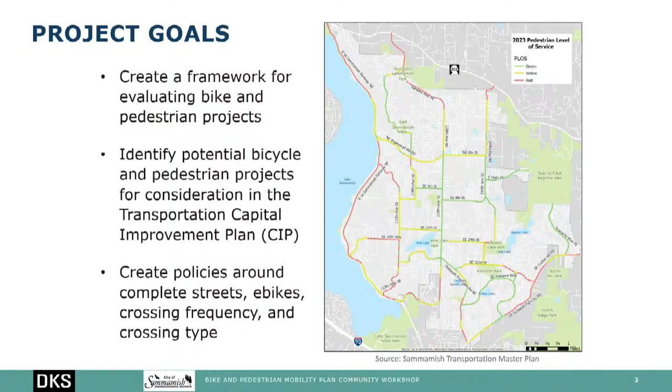All right, so schedule, just kind of where we are, where we started. We kicked this project off at the end of 2024. Like I mentioned, we did a community workshop in February, presented on some of the existing conditions, and shared the final existing conditions report soon thereafter. We've been working in the meantime on recommendations, so facility type recommendations, policy recommendations, prioritization criteria for how we decide where and what types of projects we're going to do, and then coming back to talk to you today. After this, we'll be developing project recommendations and putting those into a plan that will go to council early fall, looking for public hearing and adoption this fall as well.

All right. So what we heard, so last, like I said, in February, in addition to the community workshop that we had, we also had an opportunity to put comments online. There's a mapping tool that we had that people could put pedestrian comments, bicycle comments, safety-related comments, things like that. We got over 280 comments from the community, from over 100 contributors. So thanks to everybody who contributed to that and let their opinions be heard.

So thank you. In terms of what we heard, when it came to pedestrians, it's really about a desire to see a completed sidewalk network, expanding the amount of sidewalks. I heard a lot about speed enforcement, so some speeding concerns, safety concerns throughout the city. Definitely heard a desire for more marked crosswalks, so that is one of the policy recommendations, hits on where we prioritize crosswalks. Also, there were some requests for more flashing beacons, so kind of enhanced crosswalks as well at some specific locations. We got some comments really all over the place. East Beaver Lake Drive got some additional requests, and the intersection of 37th and 205th also.

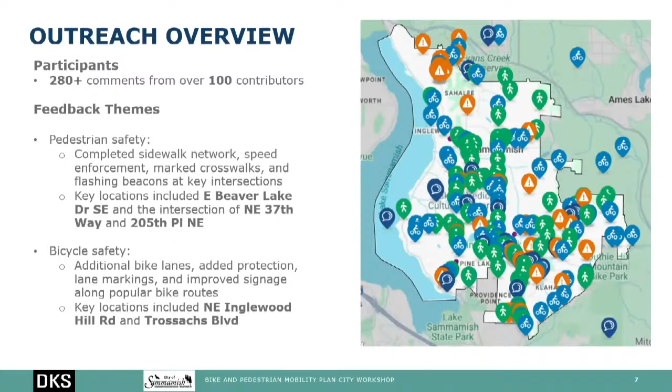So that was something that was also requested in Northeast Inglewood Hill Road, and Trossachs Boulevard was also specifically called out by several. Okay, so in terms of future conditions...

As a reminder, the plan starts off by looking specifically at what was identified as a bicycle and pedestrian priority network in the Transportation Master Plan. We called out this network as a way to get access to key locations throughout the city. It's really the city's arterial network, and the reason it's called out is to have a way to prioritize projects. We can't start off with the goal of having sidewalks everywhere, or at least being able to actually get it all done, so we had to prioritize. First thought was prioritizing on this network.

And then we have heard from the council and from the public a desire to look at access to schools specifically off of the priority network. So that was an analysis that was done as well. I'll talk a little bit about that as we go.

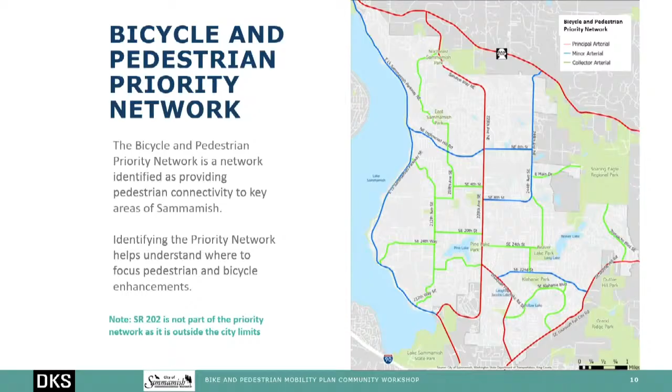We looked at the existing conditions and then also looked at projects and plans, studies that are on the TIP, the Transportation Improvement Plan for 2025 to 2030, so those that have some funding associated with them. If they had some funding, then we said, okay, let's assume the city has already identified these as a need, so let's assume that that's done by 2044, looking out.

So this is the anticipated network, or gaps - the anticipated gaps. We see that if you look back to the existing conditions, we fill some gaps. Sahalee Way is a project currently underway in design that's addressing sidewalks on one side of that street. Louis Thompson is under construction right now. There are some studies for Beaver Lake Road and 32nd, as well as Issaquah Pine Lake Road. Those are called out as we're anticipating some improvement, but there still remains gaps on Southeast 24th Street, on some parts of 212th, Duthie Hill Road.

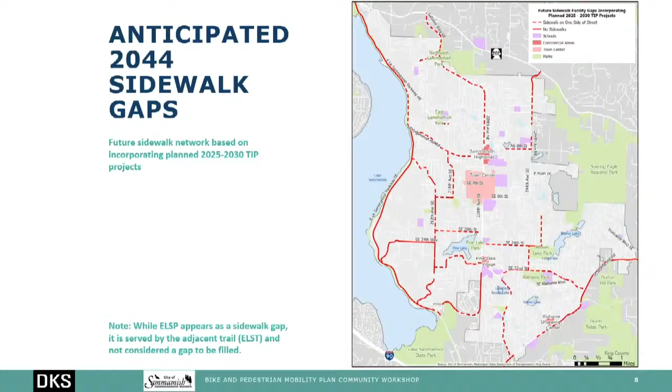So if we look at the bikes, similar story here. Again, the East Lake Sammamish Parkway shows up as a gap, but again, the trail is filling that need. Connections are the most important thing. We see a couple additional gaps for bicycles on Northeast 8th, 244th, Klahanie Boulevard, et cetera.

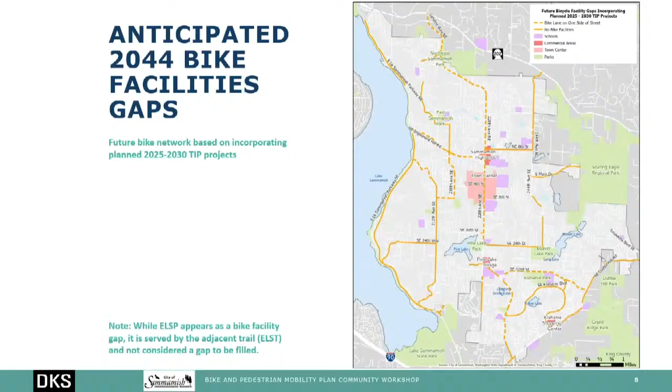So we wanted to take a look at those things first as we then think about where do we need to prioritize - where is there still a need for more bicycle and pedestrian facilities? So I did this exercise. The intent is to do a data-driven exercise, really looking at what the facilities are out there and how do we decide where do we start?

So we did an exercise in GIS, a tool that looked at several different factors. The first one was just where are there gaps - where do we not have any facilities, where do we have it on only one side of the street for both bicycle and pedestrian? We also looked at level of traffic stress, which essentially measures how comfortable that facility is for that roadway. We looked at multimodal level of service, which was adopted as part of the Transportation Master Plan.

Are you meeting the desired level of traffic stress for that roadway? Do you have a facility, but it's not quite good enough, or do you not have a facility at all? So we looked at that in terms of level of service for those roadways.

We also looked at safety. It's important too, if there's a history of pedestrian or bicycle related crashes, we want to know that.

We also considered the proximity to transit stops, schools, and commercial areas, whether you're within a quarter mile or a half mile of those destinations, prioritizing that. That's a really important thing, connecting to key destinations in the city. And we considered slope, since the city isn't flat, so at least taking that into consideration as well.

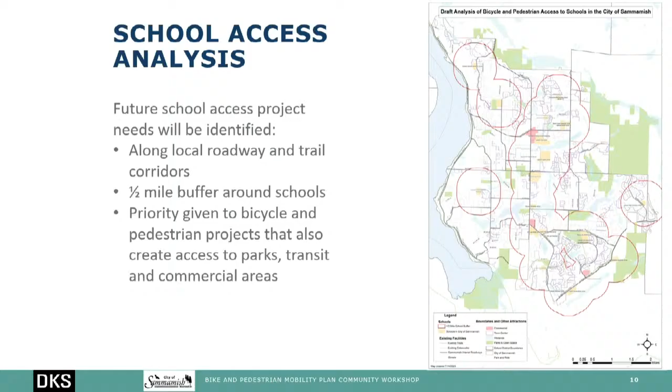Those are focused more on local roadways. So we did another analysis looking at a half mile buffer around the schools, focusing on local streets and looking at potential projects there as well, again prioritizing projects that may also provide access to parks and to transit and commercial areas, connecting schools to those other destinations.

In terms of facility recommendations, we started by taking a look at the city's existing plans, standards, policies, and codes. What does the city already say that it's doing?

And then we looked at peer cities - what are other folks around us doing? What is the city of Bellevue, Redmond, Issaquah doing? What are their recommendations and guidelines related to pedestrian and bicycle facilities? We also looked at state guidance - what does WSDOT have to say?

What is national guidance? I think that really helps the city potentially access more grant opportunities. If they're in alignment with what the state is recommending, that gives you more opportunities to potentially get grant funding on projects. And then we based our recommendations on the roadway characteristics.

So either the roadway classification - principal arterial, minor arterial, collector arterial - we also looked at the posted speed limit. That's a big factor in people's comfort levels on bicycle and pedestrian facilities. Also volumes, how busy is the roadway that you're walking or biking next to, and the number of travel lanes as well.

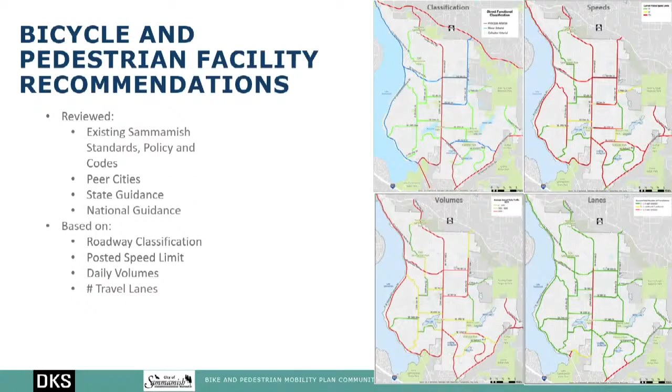Volume as well - the highest roads, obviously 228th, but several others are over 6,000 daily vehicles on the roadway. And then the last one is lanes. Most streets are one or two lanes, one lane in either direction, except for 228th.

So when it comes to level of traffic stress, I talked about this briefly earlier. Level of traffic stress is basically a rating from 1 to 4, where level of traffic stress of 1 is kind of an all ages and abilities facility. Everybody feels comfortable - it's the lowest stress facility.

It's very welcoming. And then you range up to 4, where only about 1% of people are comfortable walking or biking on that roadway. These are the expert bicyclists who can ride on a 40 mile per hour street without any facility and still be comfortable. So that's the range we're talking about, low stress to high stress, 1, 2, 3, 4.

The city in the Transportation Master Plan included guidelines for what type of level of traffic stress should be the goal for principal arterials, collector arterials, and minor arterials. Generally speaking, we're looking at trying to achieve a level of traffic stress of 2 on principal arterials, a relatively low stress facility. On minor arterials, we're comfortable with a level of traffic stress of 3.

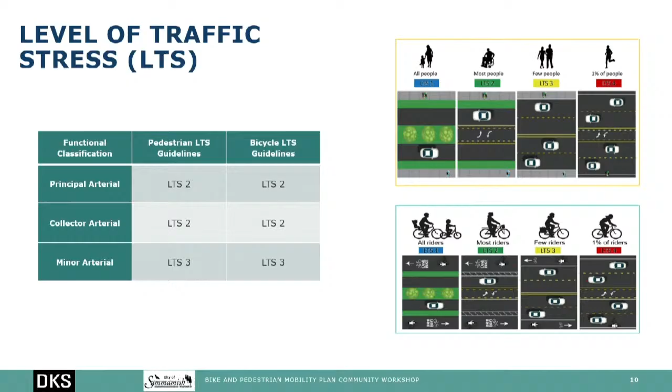Now these are, again, guidelines. They're not a requirement, but it's the goal that we're trying to achieve. And there may be reasons why the city is not able to achieve that on a particular roadway, whether it be right-of-way constraints, costs, et cetera.

So when it comes to what we were recommending, there's a more complicated table, but I simplified this to mostly be related to the speeds. So if you're at 35 miles per hour, and that occurs on your principal arterials, your collector arterials, and your minor arterials...

If it's 35 miles per hour, for sidewalks we want to see a 6-foot wide sidewalk with an adjacent 6-foot buffer, generally like a landscape strip. I'll show you some pictures.

If you're down at 30 miles per hour or 25 miles per hour, this actually is in alignment with the city's current codes.

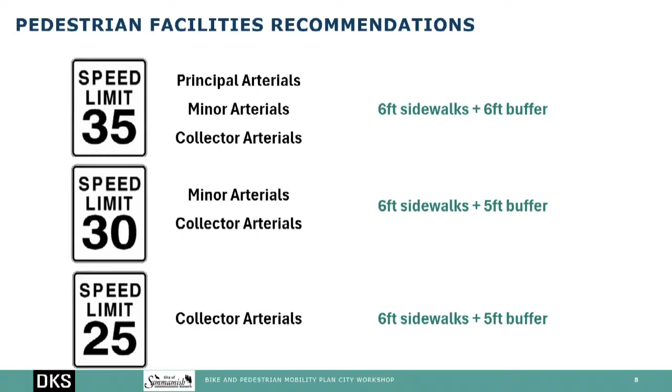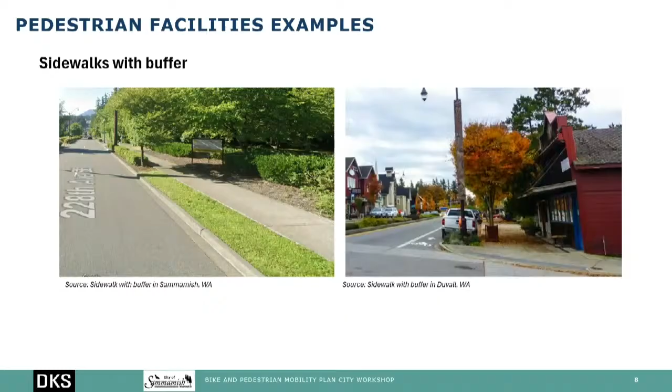So next slide, we've got some examples. This is actually in Sammamish on 228th, sidewalk with a buffer. There's other ways of achieving buffers as well, like physical separation, from WashDOT's guidance too. If you have a bike lane in between or some other facility that has a vertical difference, that's considered part of a buffer too. So there's lots of different ways of achieving that separation, which provides more comfort and lower stress for pedestrians.

Bicycles are a little different here. Again, for that 35 mile per hour road, it creates the highest stress, so we want the highest amount of separation. The recommendation, the goal, is to have a separated bike lane: a 6-foot bike lane and a 2-foot buffer between the bike lane and the travel way, with a vertical element of some sort. This is WashDOT guidance for how to achieve that level of traffic stress of 2.

These are like pylons, or in downtown Seattle you might see a planter box. I can't think of the exact term, but a planter box basically. There's ways of doing it, but a vertical separation of some sort gives more eyes for cars to see the difference between where the bike lane is and where the travel way is.

But once you get down to 30 miles per hour, and the speeds and volumes we have on city streets, both minor arterials and collector arterials, a conventional bike lane, 5 to 7 feet wide with just a stripe, will get you to level of traffic stress 2, which achieves what the city is looking for on these roadway types at that speed.

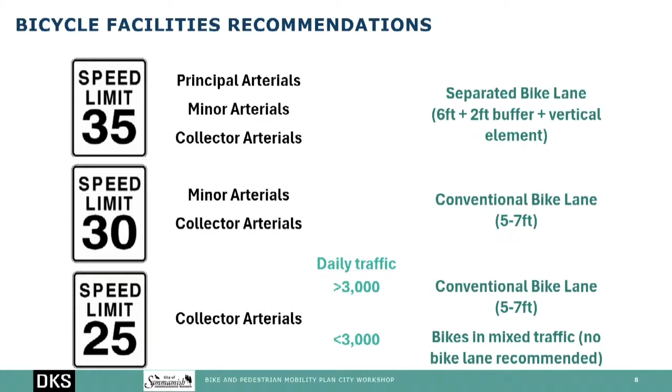Down at 25 miles per hour, this depends on the volume. If you have over 3,000 average daily traffic on the roadway, you do want to put a stripe down and put in a conventional bike lane. If you're less than 3,000 vehicles per day, I think there's no bike lane recommended — most people will be comfortable riding in the roadway in mixed traffic.

So here's some examples again, of the conventional bike lane all the way to the separated bike lane. Those little circles are to indicate that vertical separation.

In order for questions, I think we need a mic. Should we save it to the end, or is there an easier way to do it?

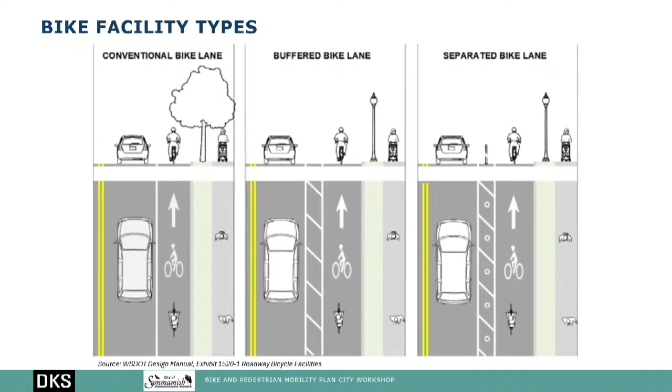Okay, all right, and then here's some examples of that too: conventional bike lane, buffered bike lane, separated bike lane. These are in different locations in Washington.

Okay, so then in terms of policy stuff too, those are kind of the physical things out there. I mentioned crosswalks — the city gets a lot of requests for crosswalks. How do we decide where we should put them and where we should prioritize them? So we gave this structure for where the city should be putting them in, generally speaking, or at least where to prioritize. First, making the statement that all signalized intersections should have a marked crossing on all 4 legs.

And then next up is some key prioritized locations: school route crossings, prioritizing crosswalks there, transit bus stop crossings, and in the town center area. Next up is locations throughout the city that have high pedestrian volume — having marked crossings to channel people where they should go and alert drivers is the next priority. And then also mixed-use centers generally, in Inglewood, Pine Lake, Klahanie.

A couple of these are just more statements about how the city sees the pedestrian network too. If we have facilities that are part of the transportation network, it should be ADA accessible, ADA compliant. And so for roadways where we don't have bike or ped facilities on the roadway itself, and we want to use an adjacent trail like the East Lake Sammamish Trail, in order to consider that part of the network addressing the need of the roadway, it should be ADA accessible.

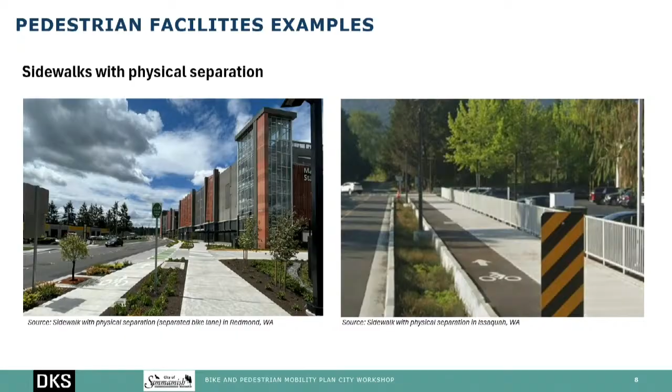All right, does anyone else have any questions this evening? Yes, absolutely—just wait for the microphone, please.

It's me again, I had a question about crosswalks. We talked a lot about the distance between crosswalks and what zones deserve more crosswalks. But something I've noticed biking around Sammamish is that some trails just get cut off by the roadway with no crosswalk—I think it's Southeast 8th Street or maybe Southeast 4th Place where that's happened a couple times. Are those projects we're considering directly, or is it too early for that? That might be a little premature. It was alluded to a bit in our response about how we're handling crosswalks, but we do have on our work plan to do an actual crosswalk study.

That actually came out of our transit plan and was supposed to be focused basically on just the transit network through the city, but we're planning on expanding that to be a little bit broader for a crosswalk study perspective for the city. I think we'll get into more of that detail when we're able to get to that plan. I think it's planned to start in 2026.

Awesome, thank you. And then I had one more thing about bump outs into street parking. I'm from Trossachs, and there's street parking all along the road there, but there are intersections that miss crosswalks and continue the street parking, so theoretically a car could park right in front of the ramp to get down into the street. I think I'm being a little too specific here, but can you guys say whether or not you will look into that, maybe as like curb bump outs as a thing?

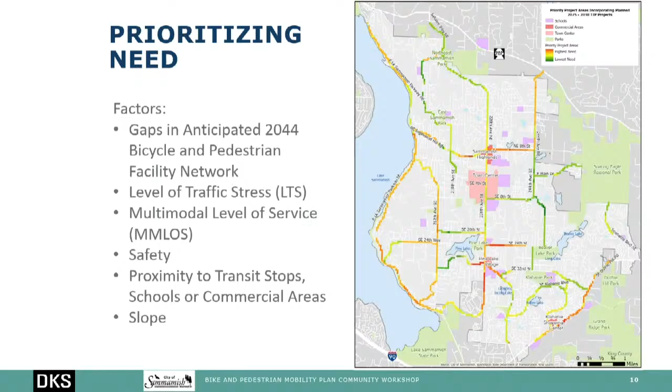And to say, well, I'm going to use the sidewalk as much as I can, means at least 3 crossings, jaywalking if you know - there's no dedicated crossings there. No, strategically, there aren't any located there, which is great for motorized traffic as far as getting through. But the other thing I'd throw out there, safety-wise, is it's got these rolling vertical slopes, so you can only see so far when the next car is coming over the hill, and you're going, okay, coast is clear, make a mad dash. That's the kind of crossing it is.

So anyway, I'll put something in writing as far as some of the specifics. The thing about it is it wouldn't take too much in terms of bridging the gap there, where there just isn't any place to walk. We're not talking miles or anything, we're talking maybe 1,000 feet or something.

I will add that's a common issue throughout the city, as the newer developments came in and did the sidewalk frontage on the roadways, you've got gaps where you don't have another new development that came in. We're well aware of that and understand the frustration. We also have limited dollars, so we have to prioritize somehow. As we're showing, it's a medium-ish to high priority. So where that falls, we'll know better once that analysis work has been completed. But definitely it's something we are aware of.